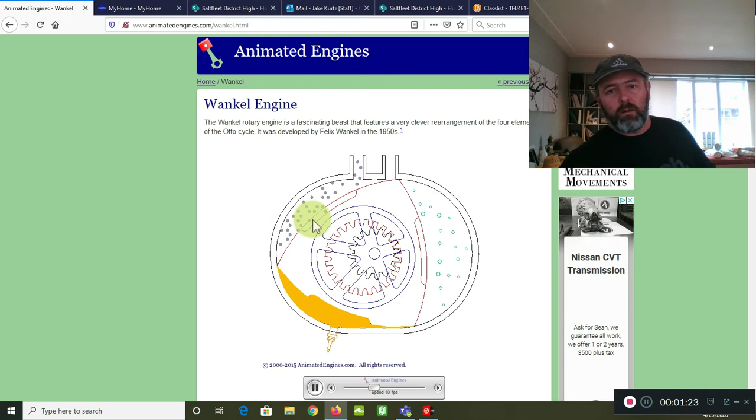And the advantage to this is that we don't waste any of the engine's power in trying to convert from up and down motion to round and round motion. So we're instantly creating circular motion. So if we wanted to drive the wheels of a car or the transmission of a car, that can be done very simply without having to move the pistons from the up and down motion into rotational motion.

So that's the Wankel. And if we stop this, I'll just give you a look at what's happening here. You can see here's our intake valve, or our intake port. There is no valve on it as such. And as this shape rotates around inside this, it creates a low pressure zone, which would pull in or suck in this fuel and air mixture. And if you watch, you can see that that space gets bigger and bigger, so it would suck in more and more.

And then all of a sudden it starts to compress. You can see that the fuel particles are being compressed a little bit here as this rotates down. So the compression is happening at this point. And you can see we've got these little cutaways here. This is so that there is actually some space for the fuel-air mixture to go to when this completely bottoms out at the bottom here.

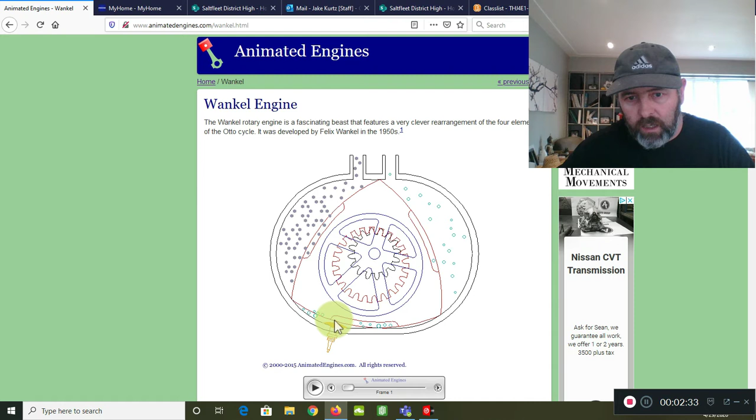So you can see all of that fuel-air mixture gets compressed into this tiny little space, and then we have ignition happening over here, which starts to push that device around, and we have our flame front rolling out, and then of course the exhaust, if you want to call it a stroke, the exhaust portion of the process is happening up here. So that's the Wankel rotary engine. Very interesting engine, and there's certainly more that you can find out about it if you'd like.

You should ask Mr. Panisi when we get back to school. He actually has a cutaway of this engine in his shop.

So now let's move on to jet engines. These are very different because first of all, we need to make a distinction between rockets and jets. But before we do that, we should understand that with these sorts of engines we are no longer trying to contain the expanding gases and use them to move a piston as such. We know from Newton's laws of motion that every action has an equal and opposite reaction.

And so if we have gases that are expanding out the back of an engine like this, then the engine must be responding to those expanding gases by moving in the opposite direction. And we get something called thrust as a result of that. So if we're ejecting a whole lot of stuff out the back, that eventually will cause this to accelerate in the forwards direction. And that's how thrust works. This is how we make airplanes fly. It's how rockets go up into space. It's what SpaceX does, and Virgin Galactic, and all of those sorts of things.

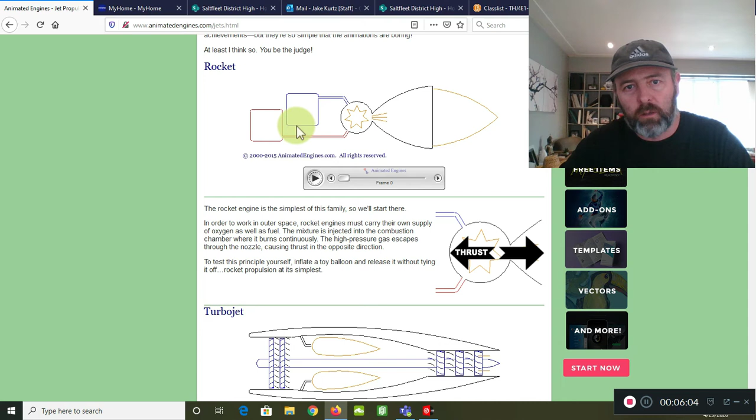And we use rocket engines because we have to take them out into space. And in space, of course, there's no air. And so there's nothing to oxidize the fuel in. So we have to bring our own oxidizer, this oxygen, liquid oxygen, or something like that that would allow for combustion to occur. If we're staying at least in the Earth's atmosphere, we don't have to bring along that oxidizer because we can take for granted that there's oxygen in the air.

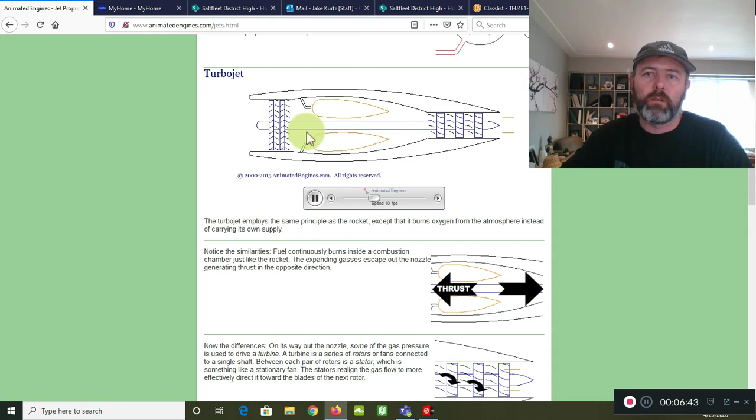And that's where ideas like the turbojet and the turboprop and the turbofan come into play. And these are all different takes on the same idea. But I'll go through how this works. And then I will post a video for you to watch if you're interested, only if you're interested, which takes you through a cutaway of one of these. It's a turboprop engine, I believe, that they are looking at.

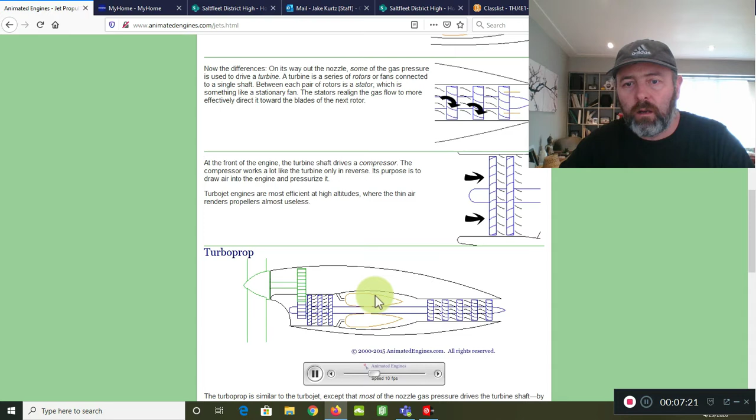And these are used not only for driving propellers, but they can also be used as a power source for lots of other equipment in industrial processes. So they're not just restricted to aircraft. They're also used in industry for a variety of things. And in fact, an engine very much like this is what powers some of the most advanced tanks in the world. You'd be surprised, I think, to think about that. But we are actually using the turboprop engine to power tanks, which is kind of interesting.

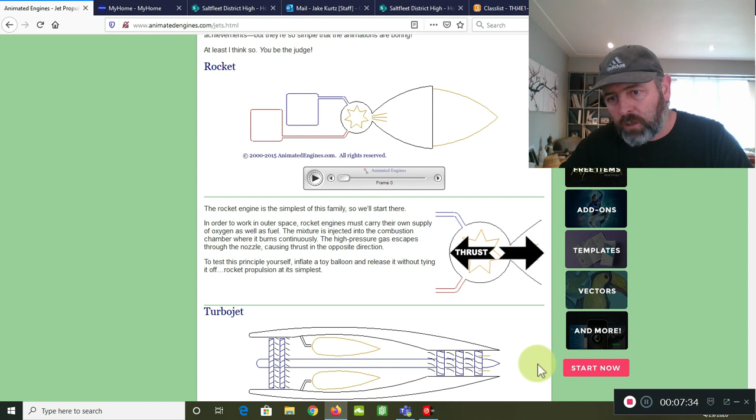So again, we've got this idea. Up here, we were talking about thrust. And here, we've got the same thing. We have thrust exiting out the back of the engine. But the interesting thing is how this all works, because it's a little bit more complex than people might imagine. Up here, you can see these two things here are called compressor blades.

And these compressor blades, basically, depending on the engine, there may be 2, 4, even 10 rows of these compressor blades. And then in between the compressor blades, there will be something called a stator. That's what these things here are. And the stator basically realigns the airflow after compression has happened and makes it ready for the next stage of compression. And this becomes really important because what we do is we compress the air, so we're increasing the amount of air that's available inside the combustion chamber.

And that means that if we increase the amount of air, then we can increase the amount of fuel. And if we have fuel and air burning at an increasing rate, then we get increasing thrust. Now, in order to make this sort of self-sustaining, what the engineers have done is they then put these turbine blades, which are almost the reverse of the compressor blades. The turbine blades are at the back, and they would have a stator in between each set of turbine blades.

And as these gases go through the turbine blades at the back, they cause this shaft running up the middle to rotate even faster, which causes the compressor blades at the front to compress more air and fill this combustion chamber with more air, which means we can now add more fuel, and we get a hotter flame and higher temperatures and higher expansion of gases, which in turn feeds the turbine at the back, which keeps the fan blades spinning at the front, and so on and so forth.

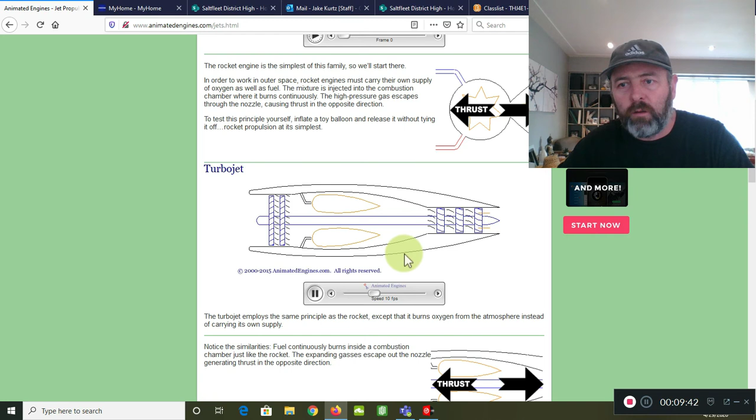And then, of course, the exhaust gases are exhausted out the back, and we have Newton's laws of motion, which basically mean that this pushes forward. If you put 4 of these on an aircraft, you can actually lift a very, very heavy machine full of people and luggage and everything else into the sky. So it does actually work, despite the fact that it seems very simple.

If you look down here, we could do the same thing where we actually introduce a gearbox and we drive a propeller. So propeller-driven aircraft could use this kind of a turboprop or turbofan arrangement. And again, you see here at the back, we've got even more of these turbine blades, and we've got lots of compressor blades at the front. But basically, it works the same way. We just have a gear that reduces the speed of this engine so that it can actually power a propeller, which is what drives most of the thrust.

So here, we're not talking about getting thrust out the back of the engine. We're trying to use that thrust to drive these turbine blades here, which in turn spins the shaft at the front and drives the propeller. And the propeller is what provides the thrust. It's like turning an airplane wing horizontally and having it slice through the air to create that forwards motion.

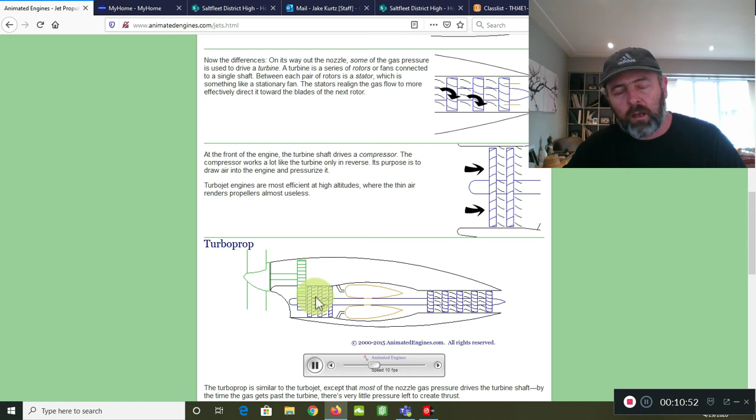And it's this configuration here that's used in industrial applications. If you can turn a propeller blade like this, you can imagine we could hook up pretty much anything that we want to this, whether it was a pump or we might be trying to power a compressor for compressed natural gas in pipelines and things like that. In fact, this is one of the major applications of this engine, in pressurizing pipelines.

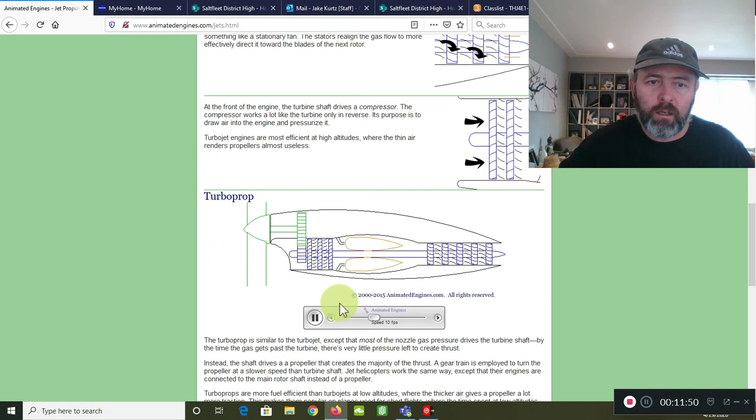And the thing that's really interesting about it is that we can use a variety of different fuel sources for this too. So it doesn't have to necessarily be configured to use aviation fuel or kerosene. It can also use natural gas. So if you're in the business of providing pressurized natural gas and you have lots of that around anyway, you can use some of it to drive a turboprop like this or a turbine engine to help pressurize the pipelines themselves. So that's another way of looking at it.

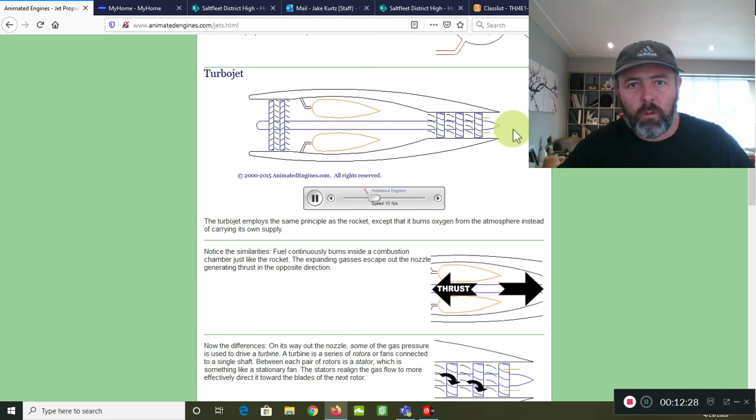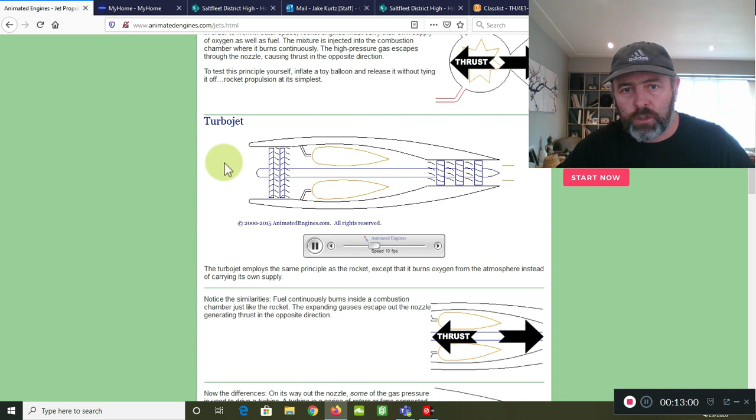You might ask yourself, well, why do it this way as opposed to with a propeller or as opposed to with just a simple jet? Well, it depends on what the application is. For lower altitude flight, we typically want to use propellers because the air density is better suited to using a propeller. For higher level flight, where we're worried about long distances and better fuel efficiency, we probably either want to use a turbofan or perhaps even the turbojet, because with thinner air and a compression system, we can compress that thinner air and get a better fuel burn inside the combustion chamber. And that's how that works.